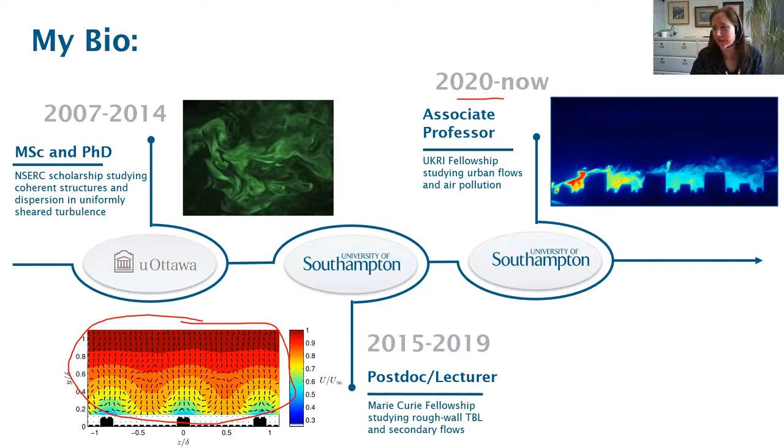So that's a timeline of my career path, but I also feel like it won't be complete without mentioning that for the past 5 years, I've also had this other side project called Kids. This is Royce and Jack. They're 4 and 2 now, but this picture is a bit old, and I just thought it was incomplete talking about myself without mentioning them, as they've also been an important part of my journey to where I am now. I could talk about them at length, but

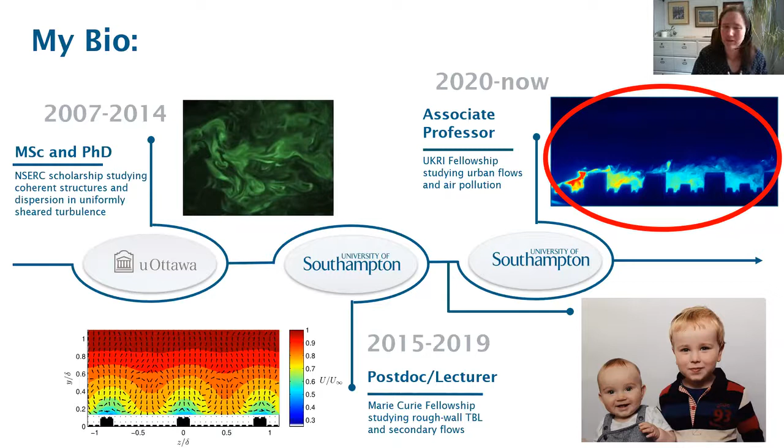today I'm going to focus on urban flows and air pollution and the latest work that I've been doing at Southampton. So here's an outline of what I'm going to talk about today. First, I'm going to talk about the current challenges for modeling urban flows. I'll then discuss 2 case studies that we've looked at in our lab. The first one is studying idealized fractal cities. The second one is looking at a scale model of a real Beijing neighborhood where there are new tall buildings being built. After the case studies, I'll wrap up with what we learned from these studies, and I'll conclude with the outlook for ongoing and future work at Southampton.

So why do we study urban air pollution? Well, presently, there's a push to improve our ability to model air quality in cities. According to the World Health Organization, more than 80% of people living in urban areas are exposed to unsafe levels of air pollution. With more and more people living in cities now, and the latest figure I saw was more than half the world population lives in cities, this obviously has a large impact on the health of our global population. So modeling is not only important for forecasting air quality, but also for making policy decisions.

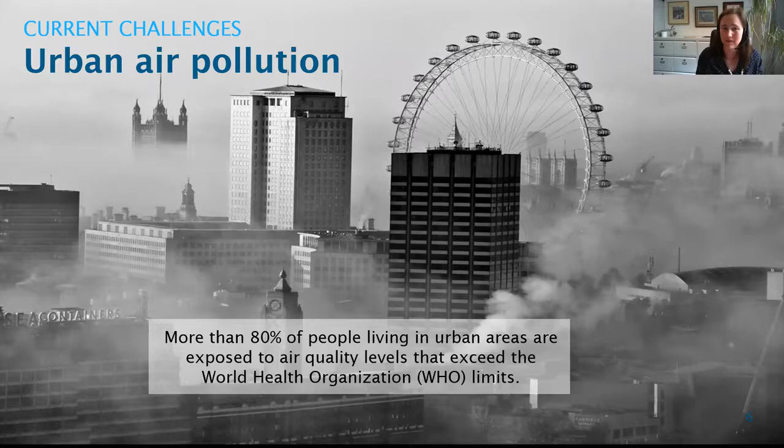And I'm interested in this problem because it's essentially a huge fluid dynamics problem. You can consider the atmospheric boundary layer as essentially a turbulent boundary layer over a rough wall, where the buildings and the trees are essentially the roughness. And when you look at it this way, you can see how knowing the wind profile, so sketched here, that's going to be important for predicting urban climates, for predicting wind comfort, for predicting pollutant dispersion, which is what we're going to talk about today, wind loading, among other applications.

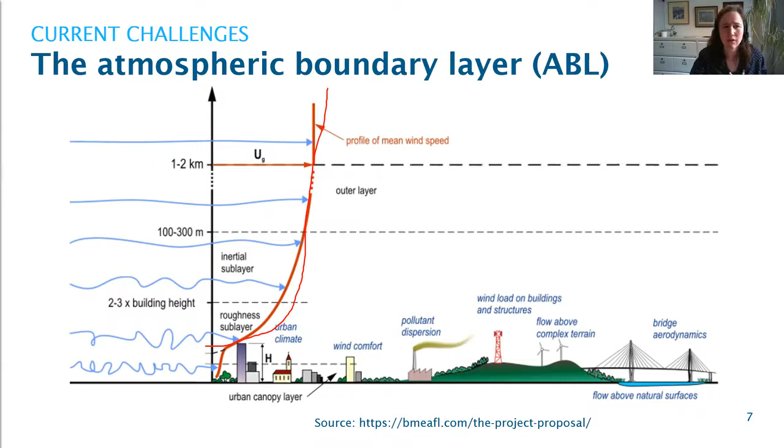So the typical approach for numerical weather prediction is to divide up the world into a grid, both horizontally and vertically. And typically the grid cells are on the order of 10 kilometers, but I know the UK Unified Model does get as refined as around 1 kilometer sometimes. And then they look at each grid cell and look at the type of surface roughness in that grid cell, and basically classify it as, say, for example, tall buildings, industrial, forest, farmland, desert, or water, and look at the mean properties of the surface in that grid cell.

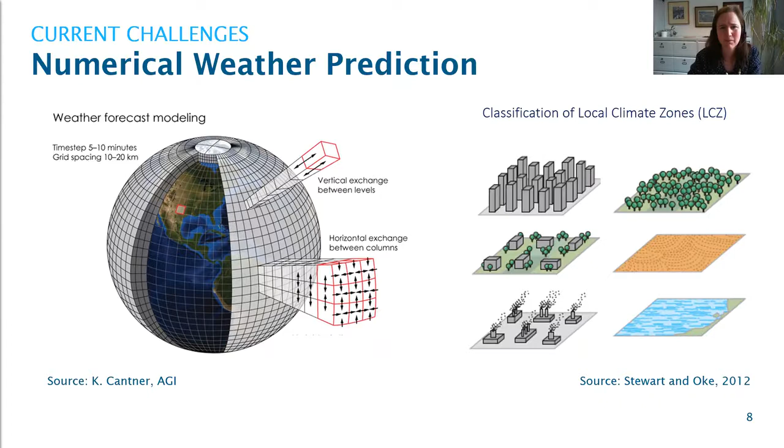And the vertical wind profile is then essentially determined based on those mean surface parameters, so assuming homogeneity inside that grid cell, as well as the stability conditions. So that's typically the approach now. And you can see that there might be some problems with that when you change the scale. So by assuming everything is homogeneous within the grid cell, you figure out the log law that describes the mean velocity profile above this cell. And a good portion of the lower atmospheric boundary layer can be described by the log law in this layer. And also turbulent fluxes are fairly constant in this layer, so that helps modeling too.

But below the roughness sublayer, so in amongst the buildings and inside the urban canopy layer, I would say that all bets are off, as wind patterns are strongly dependent on the local topography. And this is a sketch from Fernando, their Annual Review of Fluid Mechanics paper, showing the log law region and the roughness sublayer region near where the buildings are. And some people assume an exponential wind profile in this canopy region, but I think that's a bit of wishful thinking, because really everything depends on the wakes of these individual buildings.

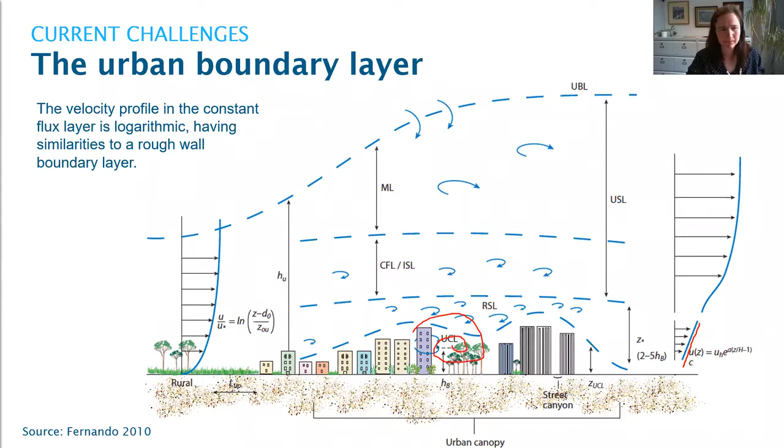So in meteorology, the different scales that we talk about are summarized as in this picture. The mesoscale at the top, that's the big picture. And the approach here is to assume that the city is kind of just a uniform homogeneous roughness, and we know what the log law looks like above this. And you can see that you don't get any of the details near the ground and around the buildings from this big picture. If you zoom right into the buildings, we would call that the microscale. And you would be looking at the individual wakes of the buildings. And this reminds me of the classic wall-mounted cube studies, say by Martinuzzi and by Castro, for example.

But in between is the local scale, where it's quite difficult to model everything that's going on. The wakes from multiple buildings might be interacting, and there might be urban canyons channeling the flow. And unfortunately, this is the typical scale that urban air pollution is transported. And so a recent UK report highlighted this current need for new frameworks designed to treat heterogeneous surface exchange at scales ranging from 100 meters to kilometer scale in this local scale range. And they identified using large eddy modeling and wind tunnel modeling to fill this gap in the knowledge.

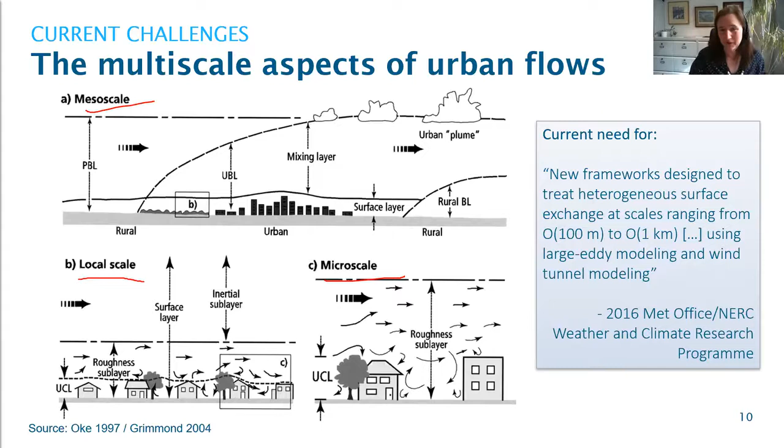So today, I'm going to be talking about what we've been doing about this with wind tunnel modeling. So I'm going to talk about two case studies. The first one is going to be looking at idealized fractal models that I came up with. And the second one is going to be looking at a real Beijing tall building model.

So the first case study was aimed at answering the question, how well do homogeneous surface assumptions work for multi-scale distributions? So as I said before, usually you take your grid size or your grid cell and classify the surface in some way. And typically that's done by looking at the average frontal solidity of the buildings compared with the plan form solidity of the buildings in that cell. And you would then estimate your flow from those parameters.

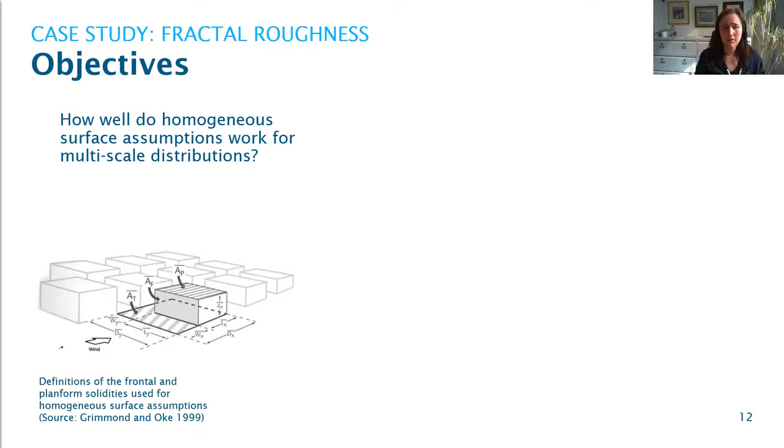So to test this, we designed some idealized fractal cities. And this model here, the CAD model I've shown, is based on the Sierpinski carpet fractal. The biggest cubes are height 10 millimeters, and then the next size is half that, so 5 millimeters, and then 2.5, and then 1.25 millimeters. And they're arranged in this Sierpinski carpet fractal pattern. And the number of cubes follows a power law. So what you end up getting is actually the total area covered by each size of cube is the same.

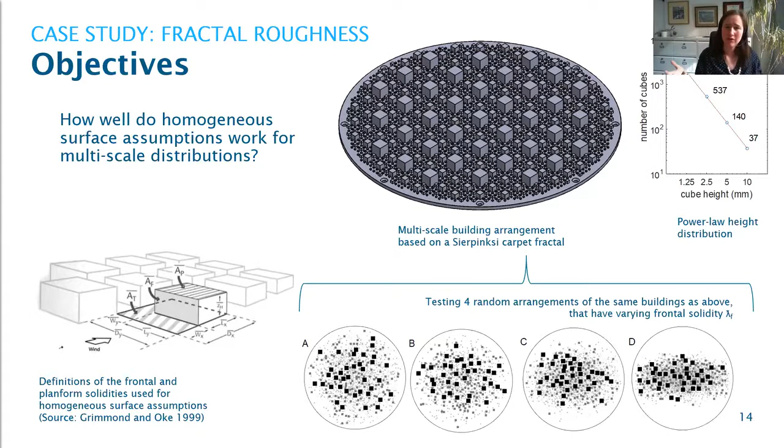And what I did is I took this multi-scale fractal picture and randomized the arrangement. So I wanted to see how keeping the same number of cubes, but changing their arrangement would change the flow. So I have 4 random arrangements of this same idealized city.

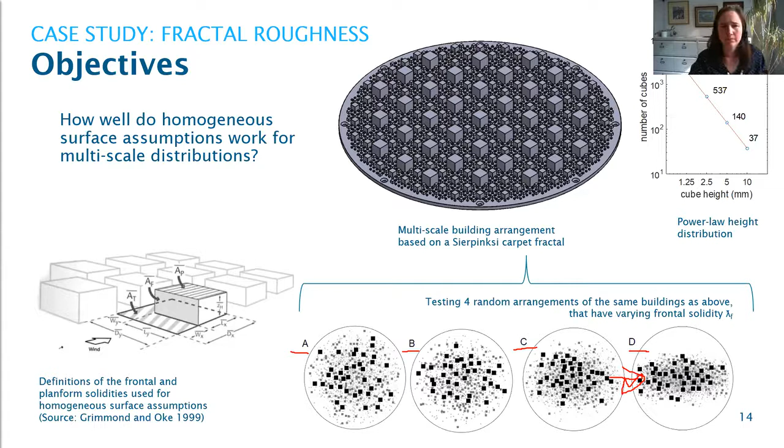The plan form solidity remains the same, but the frontal solidity changes depending on the arrangement, as some cubes are shielded from others. And so patch A here has the largest frontal solidity, and then as we go B, C, and D, you can see D with the flow going from left to right. A lot of the buildings are shielding each other, and so that one has the least frontal solidity. So these are the idealized cities I tested, and I tested them in the wind tunnel.

I did wind tunnel testing in our 3-foot by 2-foot wind tunnel using a force balance to directly measure the drag of the patch, and PIV to measure the flow both in a streamwise plane and in a stereo cross plane in the wake of the patch. So here's the patch here. We have a streamwise plane, a stereo plane downstream, and this is the force balance.

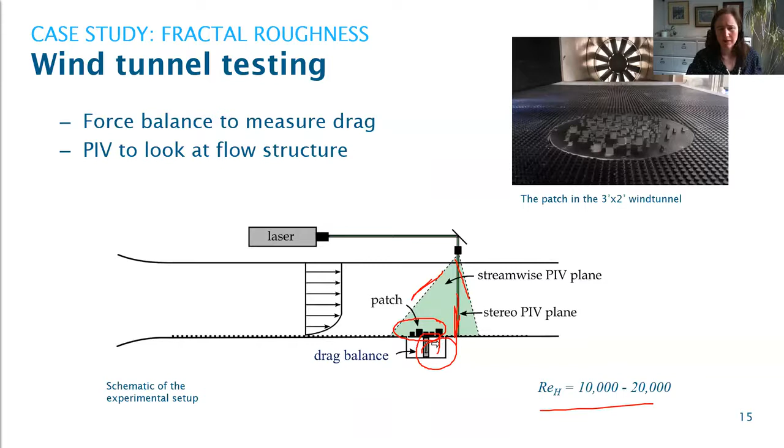And I'll just note that our wind tunnel goes at about 15 to 30 meters per second. And with the height of the cube being 1 centimeter, this gives us a Reynolds number based on the height in the range of 10 to 20,000. I also did water tunnel testing. I took the exact same patch that I used in the wind tunnel, put it in the water tunnel, and the water tunnel lets me introduce fluorescent dye as a proxy for air pollution. And I use planar laser-induced fluorescence, or PLIF, to track that concentration.

And when you take the exact same model from the wind tunnel to the water tunnel, obviously we can't run our water tunnel at 15 to 30 meters per second. The maximum speed in the water tunnel is about 1 meter per second, but the density is higher. So the Reynolds number ends up being not too different from the wind tunnel Reynolds number. Here in this case, it was about half. But what we know from studies of flows over buildings and in cuboids is that typically for Reynolds numbers beyond about 5,000, we expect some Reynolds number independence. So I'm not too worried about the difference in Reynolds number here, and expect the results to be comparable. So let's look at the results now.

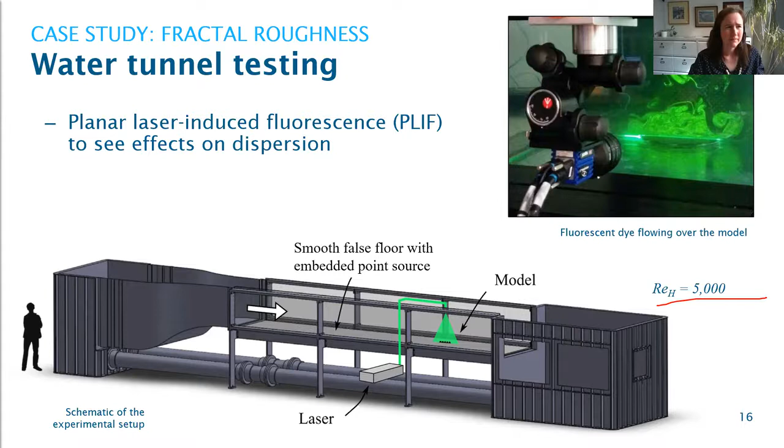Here are the drag measurements in the wind tunnel. The force balance measured the force presented here in grams. So here's the drag on the y-axis, and I varied the wind speed to get a range of Reynolds numbers, as I said, between 10 and 20,000. And we have 5 lines corresponding to the 4 random arrangements and the 1 organized Sierpinski pattern arrangement. And we can see for all the cases, the drag goes up with Reynolds number, as you would expect.

So let's plot this as a coefficient of drag instead. So here's the exact same data, but plotted now as a coefficient of drag, and we can see the Reynolds number independence here. The plots are pretty flat, and we can see that the red curve has the highest coefficient of drag, and that's patch A with the largest frontal solidity. And the orange curve has the lowest coefficient of drag, and that's patch D with the smallest frontal solidity.

So let's plot these average coefficients of drag versus solidity, and we get this curve here. So you can see that the 4 randomized patches, A, B, C, D, fall quite nicely on the curve that's predicted by theory. And the outlier we have is the Sierpinski carpet arrangement, funny enough. So I thought that was a bit of a surprise.

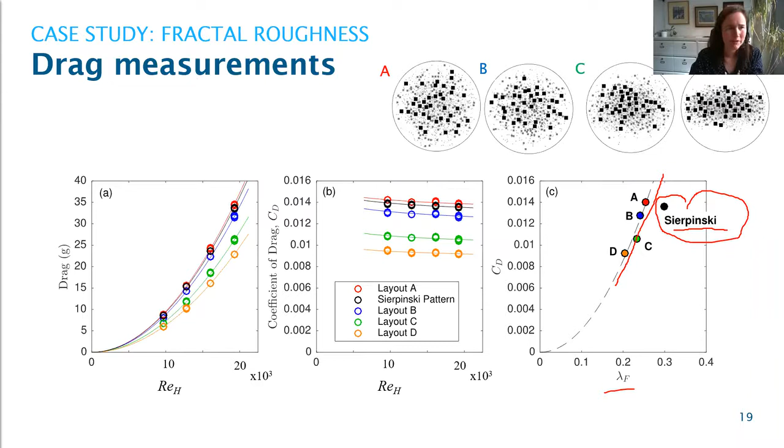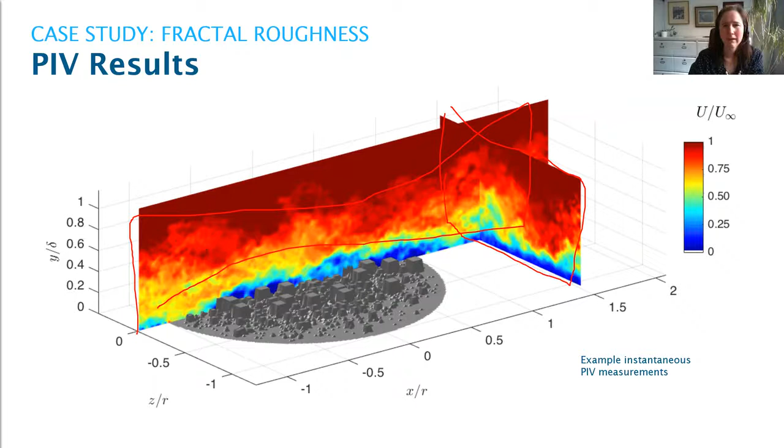So here's a nice picture showing some instantaneous results, and it's highlighting the planes that I measured. So I have the streamwise plane through the center of the patch, and then the cross-stream stereo PIV plane in the wake of the patch. And you can see, well, here the free stream is in red, and the patch is definitely having some effect, slowing down the flow, which you can see in the blue contours. Let's zoom in here and look at these results in more detail.

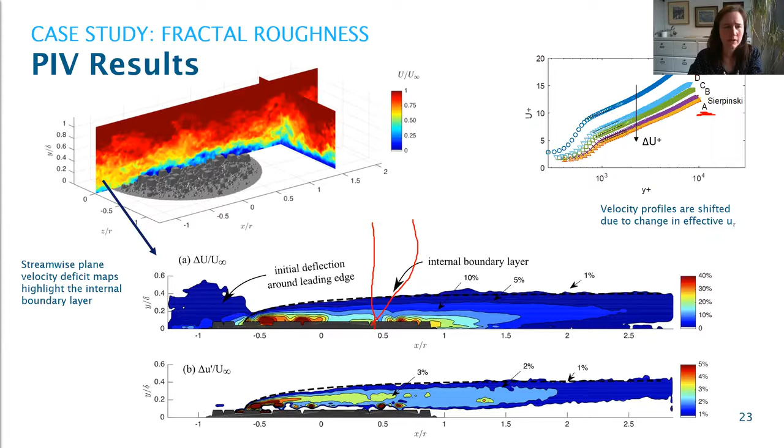Now let's look at the velocity measured in the wake. So again, here I'm plotting the velocity deficit behind the 5 patches. The organized patch at the top, and then A, B, C, D going down. And we see that the wake is larger for the patches with greater frontal solidity. And clearly the narrowest patch D has the narrowest wake.

And integrating these wakes gave the same trend as the drag measurements that I've just copied here. So you can see it by eye, really, that the size of the wakes increases for the patches that have more drag. So that was interesting to see as well.

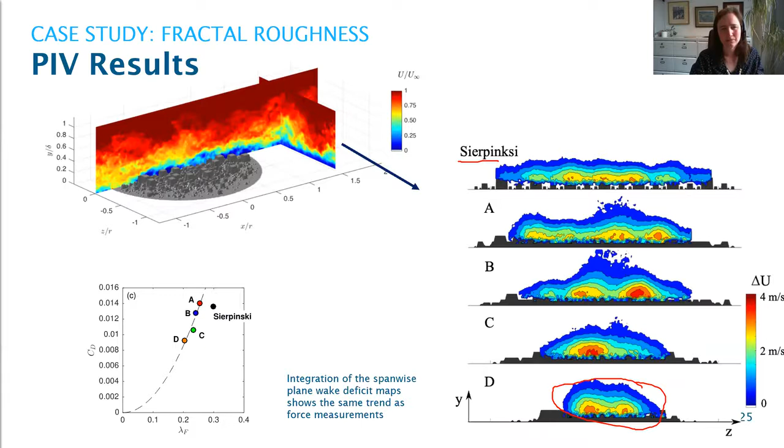Now let's look at what the concentration does. So I have a ground level point source upstream of the patch. So it's about here that the fluorescent dye was injected in the water tunnel. And this top picture is the instantaneous concentration map, and you can see it showing the sort of billowy, flappy edge boundary of the concentration as it's passing through the urban canopy. On the bottom is the average concentration map, and I've plotted this in log scale just so we can see it a little bit better.

And what you can see is that it's really this first building. It seems to kick up the concentration, and then there's a kink in the concentration profile, and the boundary of it then grows sort of steadily over the patch. So I wanted to compare the boundary from the concentration with the boundary from the internal boundary layer from the velocity maps, and this is in this plot here.

So we can define the boundary of the plume in two ways, either from the contour line. So the contour line would be about where the light blue is, about 0.5% of the source concentration. And I said it was a log scale. So 0.5% is actually a good number to pick as the boundary. And this is the red curve I've plotted here.

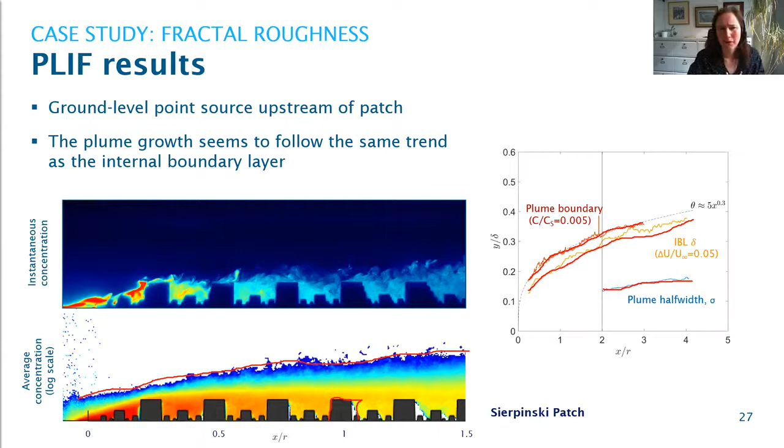So just to summarize what we learned from these idealized fractal city studies was that the surface morphology wasn't too bad, actually, at predicting the trends of the results, except for when there was an organized pattern. And in my opinion, I would imagine this would actually be the majority of real cities, because often buildings are organized along streets and blocks. So this does raise a flag for using this approach for real city predictions.

And then secondly, we saw that the internal boundary layer does appear to somehow modulate the extent of the dispersion. And this is something that I want to be looking into more. And so you might have seen the results of these studies before. They're published in Boundary Layer Meteorology and also from the TSFP conference that was in Southampton in 2019.

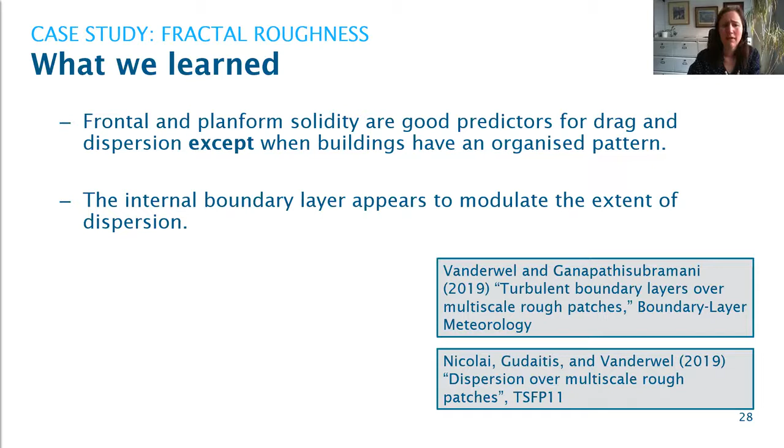Now, let's look at the Beijing tall building model, a real city model. And these are unpublished results, so you get to see them first. So the objective of this work was to see the impact of a tall building on the flow, structure, and dispersion. This work was in collaboration with Sue Grimmond's team at the University of Reading and Maarten van Reeuwijk's team at Imperial College London. And we compared our experiments that we did in the water tunnel with LES done at Imperial.

Here is a CAD model of the real neighborhood and the tall buildings in question. You can see there's quite a few of them that were being built in this neighborhood, and we want to see the impact of that on the flow structure and the air quality.

Another question we were trying to answer in this study is to compare the effect of different model sizes, because this is a question that we had when we were setting up the study. Well, what scale should we be putting the model in the water flume? So we tested two scales here, and we actually printed a model half the size of the other model, and the Reynolds number is in roughly the same range as our previous studies.

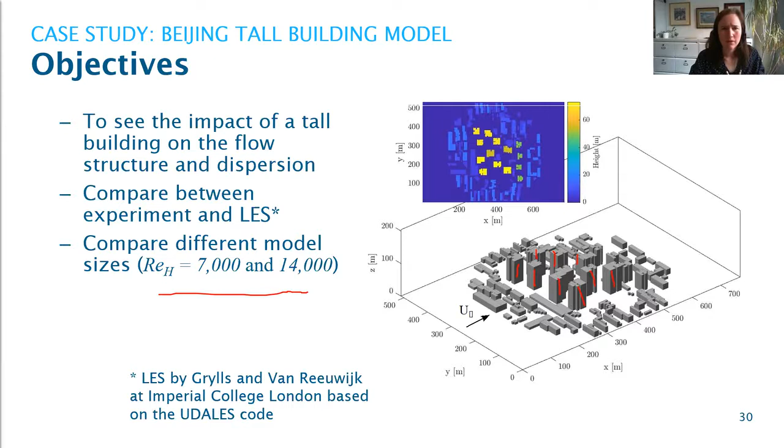So here's a sketch of that setup. Again, it was in the same water tunnel as the previous study, but this time we did simultaneous PIV and PLIF measurements. So we had 2 cameras for PIV that stitched the particle images together to get a nice wide velocity map, and then 1 camera for PLIF to measure the fluorescent dye. So the fluorescent dye is injected upstream of the patch and gets transported across the patch.

In the image on the bottom right here, this is a photograph of the patch in our water flume being illuminated by that laser sheet from above. And this image in the top right is showing the acrylic plate that we use to allow the laser sheet to pass through the free surface. Without that plate there, the laser sheet might get refracted by little waves in the free surface. And so it's just lowered to the same height as the water, and essentially acts like a glass bottom boat, is what I call it.

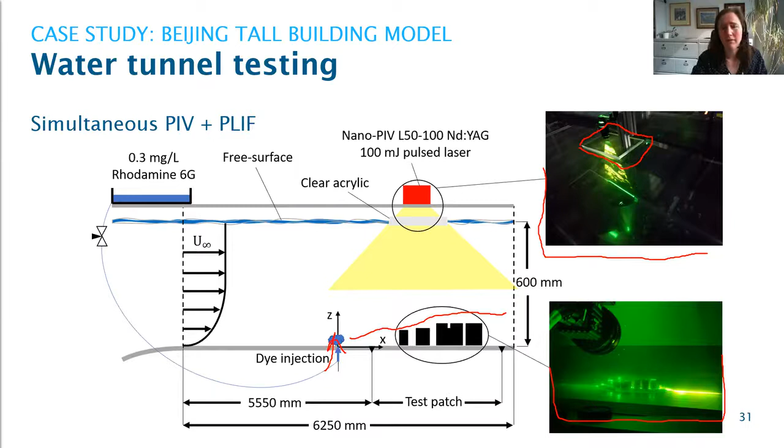So again, this is not too different from our study before, except that we have the velocity and the concentration measured at the same time. So let's look at the results. So in this case, we're looking at a streamwise velocity measurement in the streamwise plane right through the center of the patch. So I've tried to highlight this with a green shading in the CAD model and a white line in this top view of the city.

On the top here, we have the mean velocity, and below is the turbulence intensity, essentially. And the measurements, as I said, are in the center plane. And I just want to point out here that the first building that you see in the map is actually in front of the measurement plane. So it's making a shadow here. The first building that's actually in the measurement plane is this second one. Sorry, I'll try to sketch it a little bit better.

And what we can see is that the flow clearly impacts this building. So you imagine that it passes past this one, impacts this building, and then gets deflected upwards. Red was not a good pen choice there, but hopefully you can see that clearly there. So the rooftop shear layer that forms from this first building completely dominates the flow. And you can see this structure in the turbulence map as well.

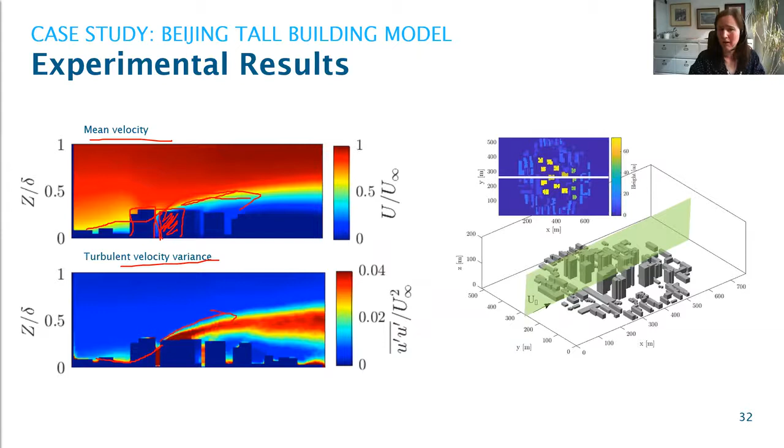So the flow seems pretty calm until it hits the first building, which kicks it up and creates this rooftop shear layer and a whole lot of turbulent activity. And so this first building is completely dictating the flow, and the features, I think, are not too different than you would expect from a single isolated building. This sketch highlights the main flow structures you would expect to see in the wake of an isolated cuboid. This is from a paper by Wang in 2006.

And I think what we're picking up here is essentially the tip vortices from the top of the building, maybe some activity at the base. And while there might be spanwise vortex shedding along the center of the building, we're not picking that up in the 2D PIV measurement. So I think what we see is these tip vortices that are creating this rooftop shear layer, which you can see in the mean and in the turbulence maps.

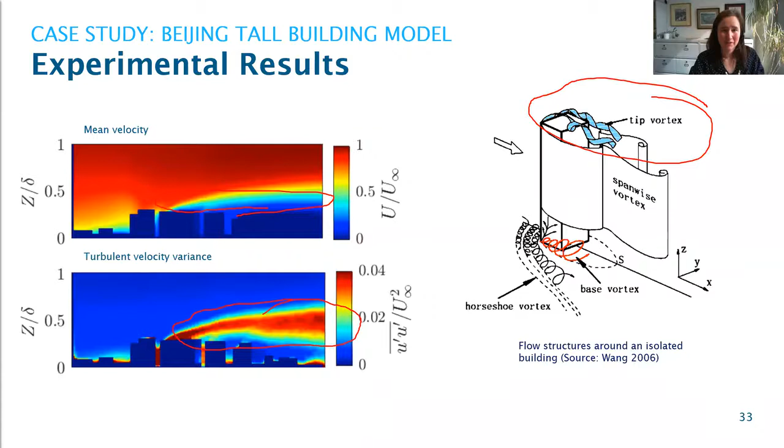So how does this affect the air quality and air pollution transport? Here are the PLIF measurements. The top image is the mean concentration map, and the bottom image is the turbulent scalar flux, which is calculated by multiplying the velocity fluctuations by the concentration fluctuations in the synchronized instantaneous images.

So what we see is that the concentration boundary, again, has a similar shape to the velocity map. It seems to be carrying through and then hits this tall building and immediately gets spread upwards by the action of the rooftop shear layer. And you can see that in the scalar flux map, that the rooftop shear layer seems to be the dominant mechanism for vertical exchange. So that's really cool, I think.

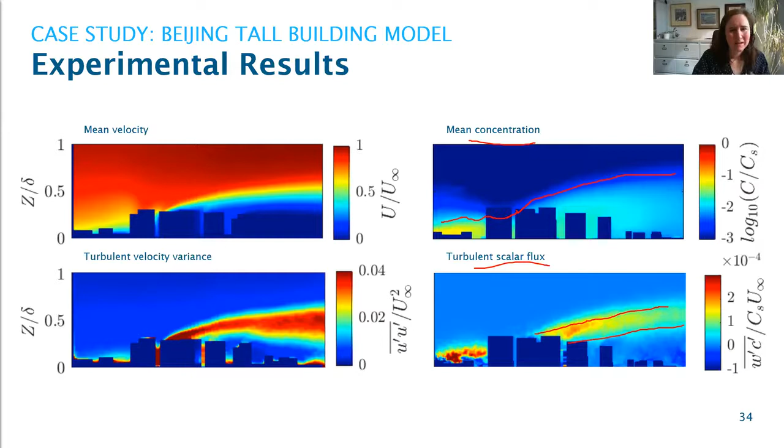Let's now compare the experimental results with the LES. While we did our best to match the flow conditions between the experiment and the simulation, there were some slight differences to the incoming friction velocity and the velocity profile. So actually, the fact that the results here are so similar not only shows us that our methods are quite good, but also that the results, I think, are not too sensitive to the incoming conditions. And I think this is because the flow is dominated by the tall building.

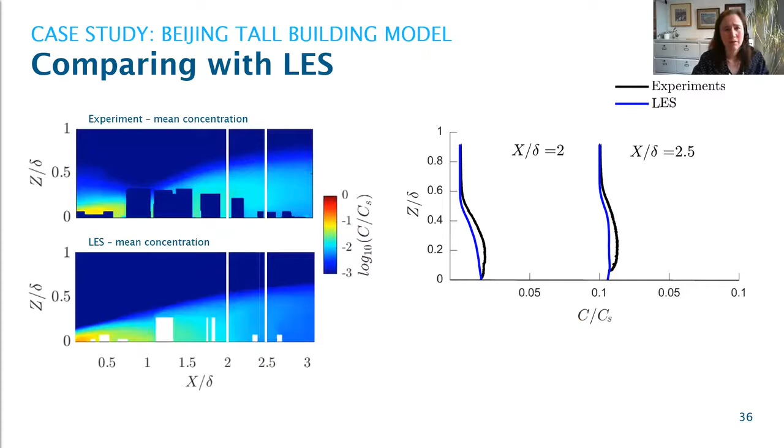Here are the concentration measurements, again with the experiment on the top and the LES on the bottom. And first, if we look at the maps, they are pretty consistent. We see the flow impacts this first building and definitely gets diverted above into this rooftop shear layer.

The profiles, on the other hand, are a little bit off in magnitude, but the boundary of the concentration very clearly matches. You can see the kink is at the same point in the experiment and in the LES. And I think that's very encouraging, showing that both methods predict the location of this rooftop shear layer and the consequences of it very well.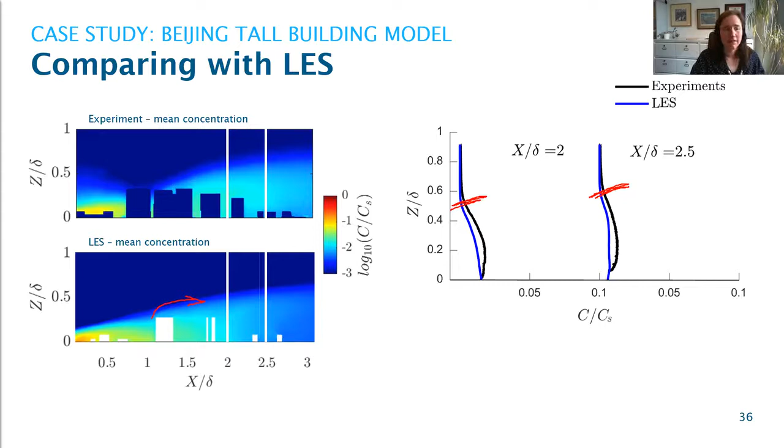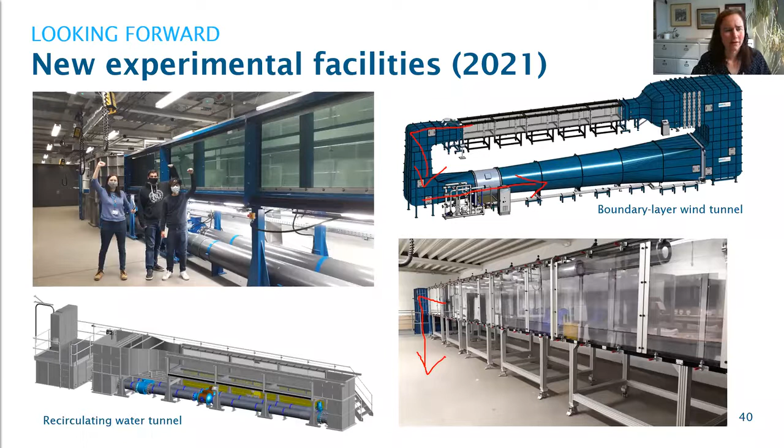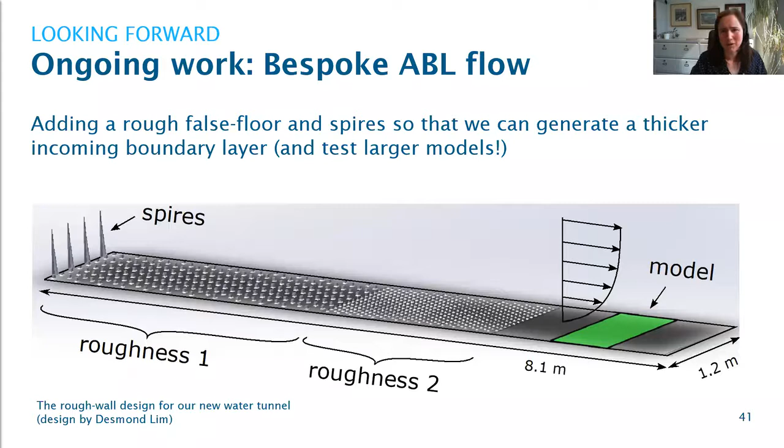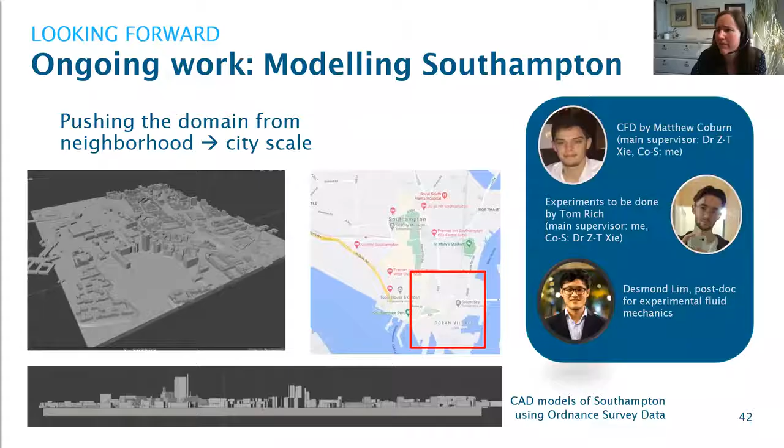Well, funny you should say that. I sort of glossed over this point in my slides, but maybe I'll see if I can share my screen again. Okay, so I'm going to share my screen again and then go back a few slides. And I'll erase all these scribbles.

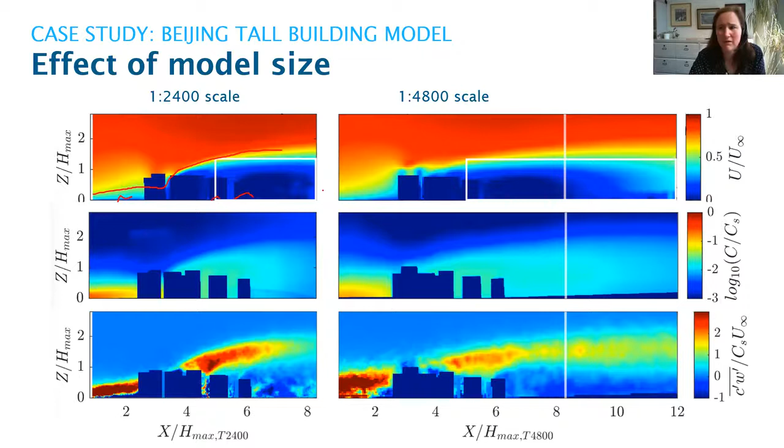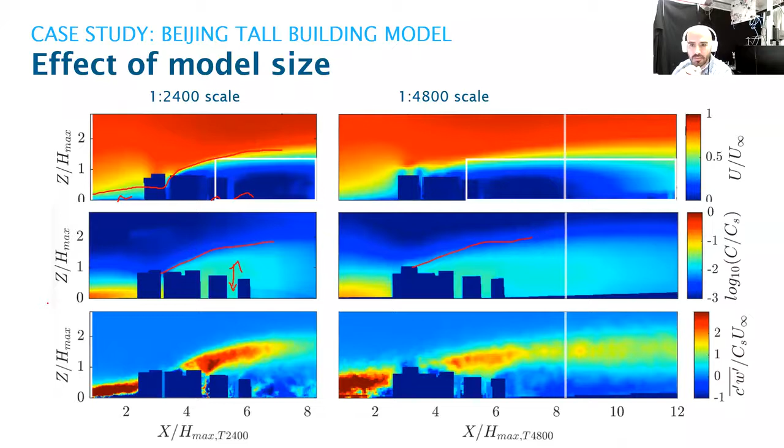Yeah, that's amazing because, sorry. Looking at the concentration maps, I see that below the shear layer, there's almost like a fully mixed region all the way to the ground. Like in here. Yeah, exactly. So that's quite amazing. So the low buildings don't have too much effect right there. Yeah, even if they were there, it's almost fully mixed. So there's nothing extra to do. Maybe. Well, that was a good question, because we definitely asked that ourselves.

I'm asking that because in my experiment, we did a similar experiment to Christina. We have a wind tunnel, and there we had two heights of roughness elements, big elements and smaller elements. And we were always trying to figure out what's the effect of having these two heights of a roughness layer. Well, anyway, thanks for the answer.